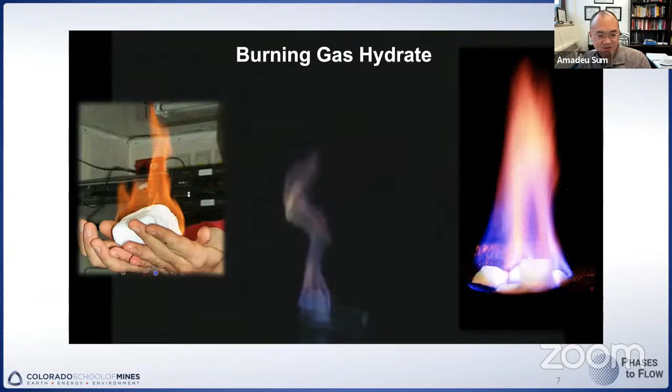Let me start off by showing you this picture, for those who may not be familiar with gas hydrates, starting from the very fundamental aspect of what gas hydrates are. What you see here is someone lighting up what looks like a snowball, but it's actually a gas hydrate, sustaining its own combustion because of the gas that's trapped and released upon dissociation. You can see it burning like a snowball - this dramatic picture of a person holding this hydrate while it burns, but it doesn't burn this person's hand because the hydrate is melting, and the byproduct, the gas, sustains the combustion. The water dripping from this person's hand is cold, so it doesn't burn them.

But what are gas hydrates really? There are four ingredients for gas hydrates: you need water, you need some gas, and the right temperatures and pressures. Under those conditions, water will self-assemble around the gas molecules. Depending on the size of the gas molecules, you form different cavities, and these cavities come together to form what is known as structure 1, most commonly, or structure 2. Those are the two most common crystal structures for gas hydrates, with combinations in a specific pattern that identify these crystal structures.

Now, what is unique about gas hydrates is that it's mostly water - by and large, you have one molecule per cage. There are exceptions, such as very small molecules like hydrogen and nitrogen, which are considered inclusion compounds.

Another unique property of gas hydrates is that they're non-stoichiometric. What I mean is that in these different cages in the crystal structure, not all of them need to be occupied - some can be vacant, giving this non-stoichiometry to the compound. Now, if you were to take one volume of gas hydrate and dissociate it, you would end up with about 160 times the volume of gas at STP, and about 0.9 of that volume in water. So there's a very significant amount of gas stored and trapped in hydrates, and that's one of their properties that has consequences for different types of applications.

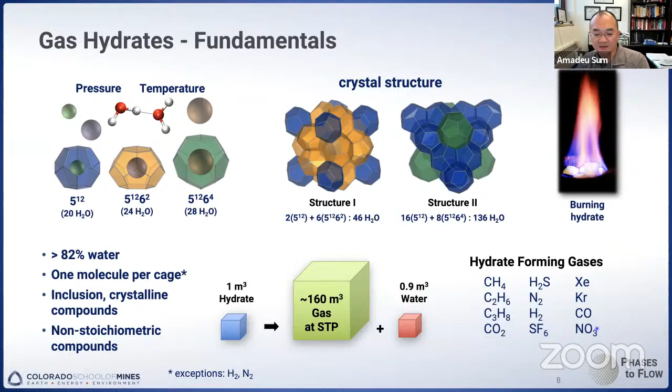Here you see a list of different gases that typically form gas hydrates - low molecular weight gases, some hydrocarbons, some inert gases. Now this is an expanded view of the water cages and hydrate structures, showing how you go about forming structure 1, which is a combination of two types of water cages. Structure 2 is a combination of the blue and the green cages. And then there's another cage denoted as structure H.

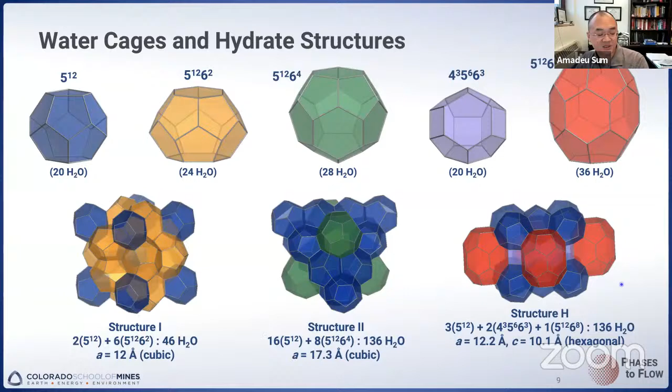That's a combination of the blue, the purple, and the red one. That's much larger, and then it can accommodate significantly larger types of molecules. Structure 1 and structure 2 are very common and mostly found in man-made systems and nature, but structure H typically is not found in most applications.

The structure here is determined by the size of the gases. This list considers structure 1, structure 2, and structure H for the pure formation of the hydrate from a single component. But of course, you can have a mixture, and then there would be a distribution of these gases in the cages that make up the hydrate structure.

One interesting fact is that structure 2 is formed with very small molecules like hydrogen or helium. Structure H requires a small molecule like methane or xenon in order to accommodate these smaller cavities, but it can also accommodate very large types of molecules, depending again on the molecular diameter, and that's what's going to determine the crystal structure.

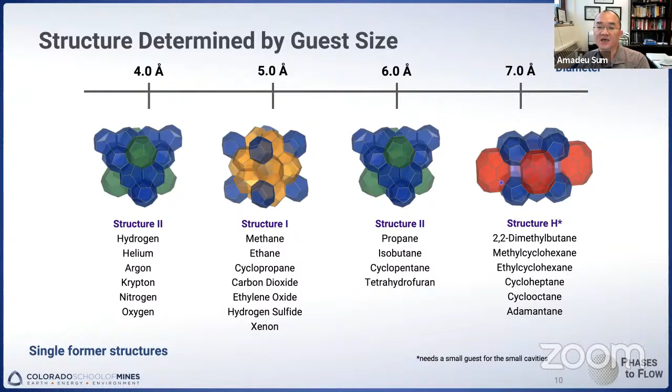Now, let me give you my view of the world of gas hydrates and how I think about them in terms of their applications and the fundamental aspects of it.

There's the good side of gas hydrates, and the good side of it has a lot to do with the natural deposits of hydrates, mostly offshore in oceanic environments, and certainly India has a lot of interest in developing the technologies for the production and recovery of gas from those natural deposits.

By estimates, the amount of gas trapped in gas hydrates surpasses all the other combined resources in terms of carbon. So it's a very, very large resource that can provide a significant amount of natural gas. Especially countries in Asia like India, China, Japan and Korea are very aggressively going after the exploration and recovery of gas from these natural deposits.

Now, I showed you that there's a significant amount of gas trapped in the gas hydrate. So it has also been looked at for energy storage due to the ability of selectively enclosing certain gas into the crystal structures.

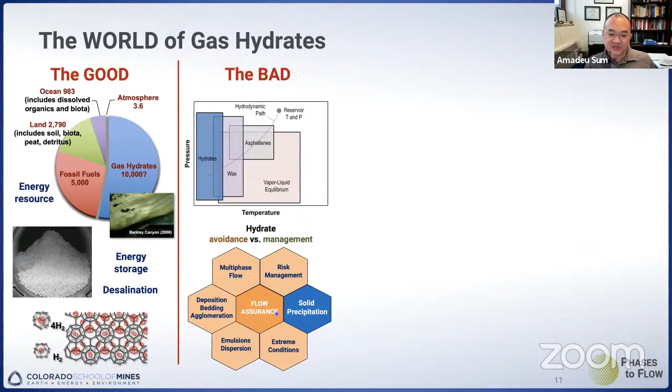The other ugly side of hydrate is that most of the gas trapped in these natural reservoirs is methane, and methane is a greenhouse gas, much worse than carbon dioxide. Especially in the permafrost, there's also a significant amount of hydrate, and there are concerns about the melting of those hydrates, and if they get into the atmosphere, that can significantly speed up the global warming and climate change that we are all already experiencing.

And there's the beautiful side of gas hydrates, and the beautiful side has to do with water. Hydrates are mostly water, and to this day, water fascinates us in what it does.

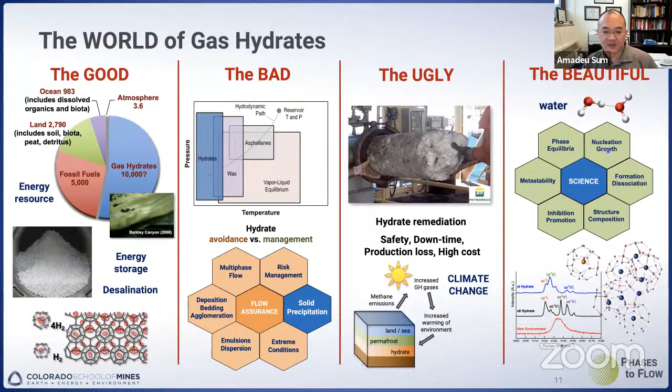And I will show you some of the work that we've been doing here just to address this beautiful side of the nucleation as well. So there's the good, the bad, the ugly, and the beautiful for gas hydrates.

Our particular group is very diverse in terms of the depth and breadth of what we do on the fundamental side and also on the application side, with a combination of experiment, modeling, and simulation. We take this multi-scale approach, looking at the very fundamental to the very applied in terms of how we deal with gas hydrates and how we try to understand it.

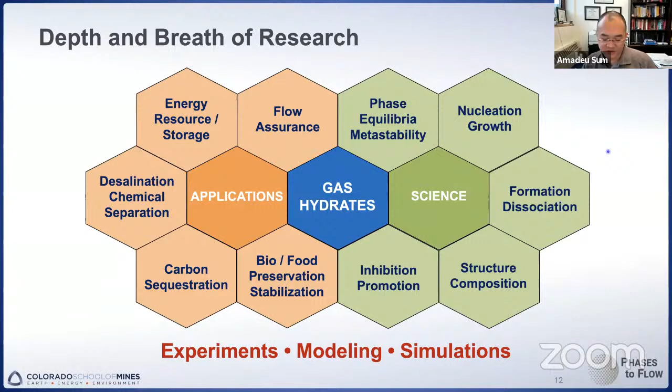So the first part here has to do with when gas hydrates form, and we are going to look at the basic thermodynamics. That's always the starting point. The thermodynamics is essential for us to define the conditions under which hydrates would form.

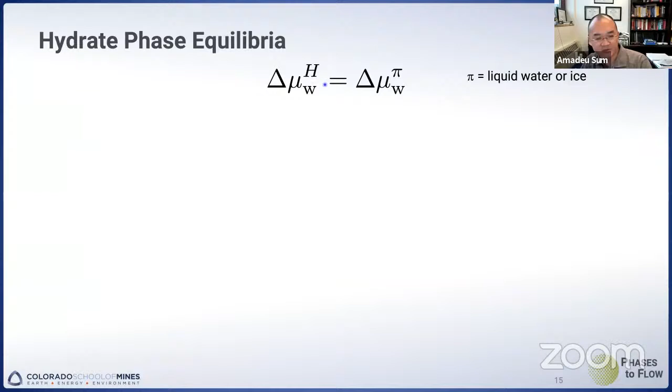That has to do with considering how we learn in fundamental thermodynamics the equality of chemical potential of water. This model, developed by van der Waals and Platteeuw back in the 1950s, relates the chemical potential of water to the occupancy of the cages with the gas molecules.

We can calculate this occupancy by considering something similar to a Langmuir adsorption that you might have learned in your courses. From there, we can determine the chemical potential of water in the hydrate phase, and in this formulation, pi considers either liquid water or ice, which we know how to calculate from changes in temperature, changes in pressure, and how that impacts the water activity.

This formulation allows us to make these sort of predictions, and it is reliable and works really well for uninhibited systems. When I say uninhibited system, it means that it's just fresh water.

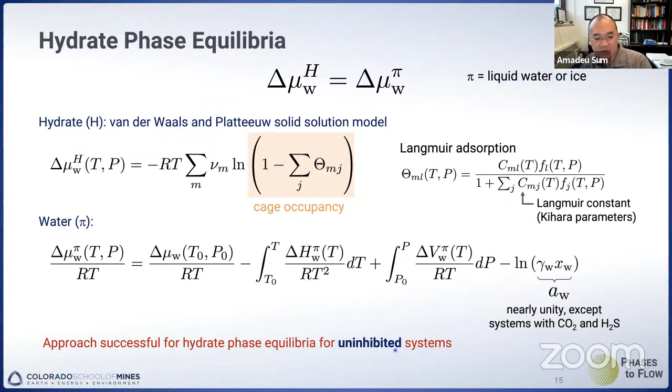But when you consider inhibition of gas hydrates, this is the same thing as lowering the freezing point of water. We can add salts or alcohols or glycols to water to lower the freezing point, and we can do the same thing for gas hydrates, shifting those boundaries that I showed you. I'll give you another example here.

All of that has to do with what you learn in basic thermodynamics regarding water activity. If you are able to determine how much these inhibitors impact the water activity, you can determine what is the suppression temperature. Over the years, we have developed a reliable correlation that we denote as the Hu-Lee-Sum correlation in order to account for that.

So this correlation accounts for any mixtures of salt, or in combination with the typical thermodynamic inhibitors that we typically use, like ethanol, methanol, or glycols.

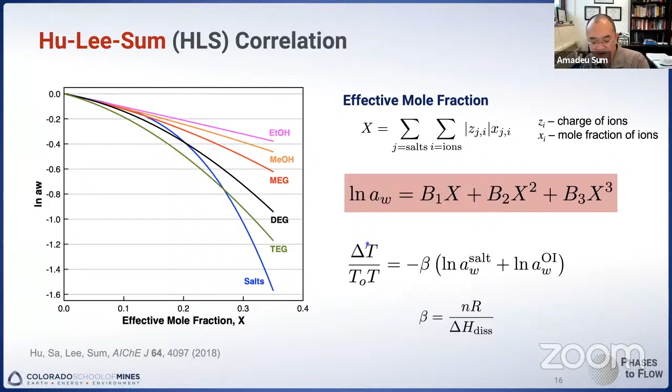This is one of the innovations that we have brought recently, which has essentially eliminated the need to make these very time-consuming, expensive measurements at very high pressure, replacing them with one single trivial measurement that most people have access to with a DSC.

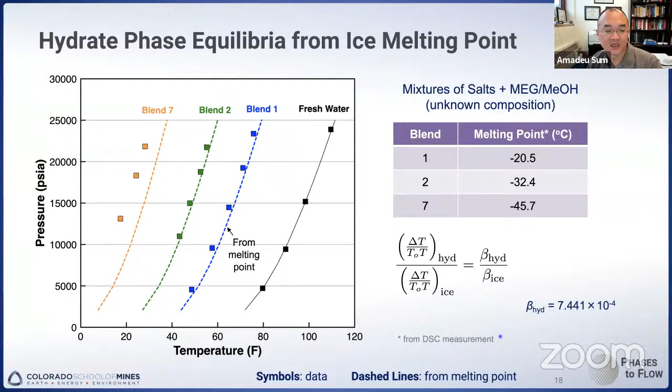Now, let me move on and tell you a little bit about how gas hydrates form at the microscopic level. I'm just going to spend a few slides here to show you what we can learn and what we need to learn about how hydrates form at the molecular level. The tool that we use here are molecular dynamic simulations.

We've been working with this for a number of years, and these are 2 of the most recent papers that we have published on this, looking at the process of gas hydrate formation for propane and for mixtures of methane and propane. We can track the evolution of the system over time.

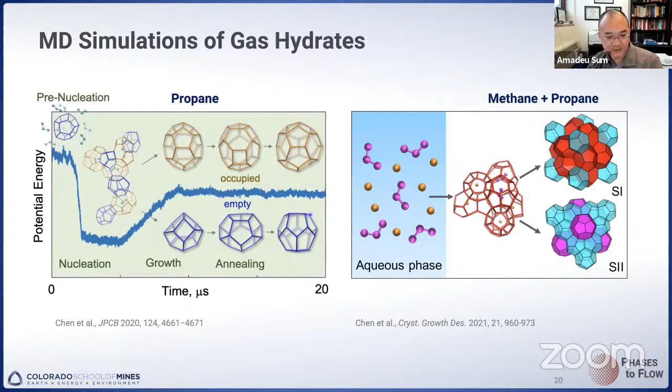From the point that they start initially completely disordered, to the point where they nucleate, and then we see some growth, and then we see some ordering or transformation over time. This is what I show you here in this video.

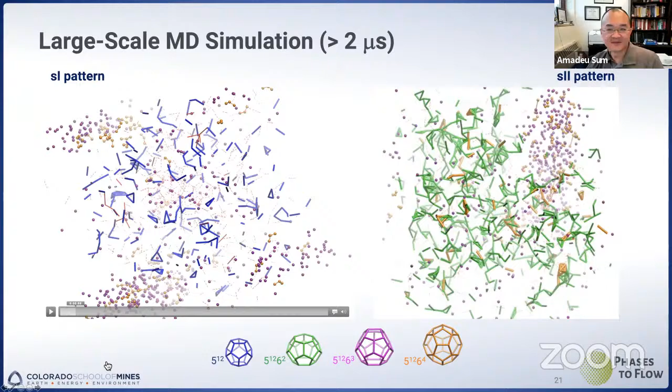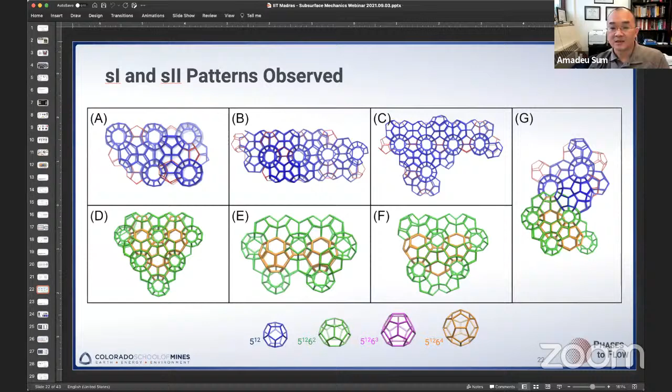Let me change here. This is for one of the simulations. Sorry, it's not playing. It's just very slow. I hope this doesn't crash my computer. I apologize for this. I'm going to have to move on, sorry. Apologies, something is happening here. Always some technical issue. Sorry, I'm not going to play the video because it seems it's going to crash my presentation. Let me just go back here, but I apologize again.

What we see from those simulations is the evolution of the system to form these patterns that can be identified as what we know is structure 1 or structure 2.

These are different examples that we have extracted from the simulations. Unfortunately, again, the video is not working, but you would see the evolution of the system from a completely disordered to an ordered state. And we can learn a lot from this.

in trying to obtain the mechanism for nucleation and growth of these crystal structures. This is still a challenge, and we want to have this insight because if we are able to understand what is happening at the molecular level, we would then be able to better control either the formation or the inhibition of gas hydrates.

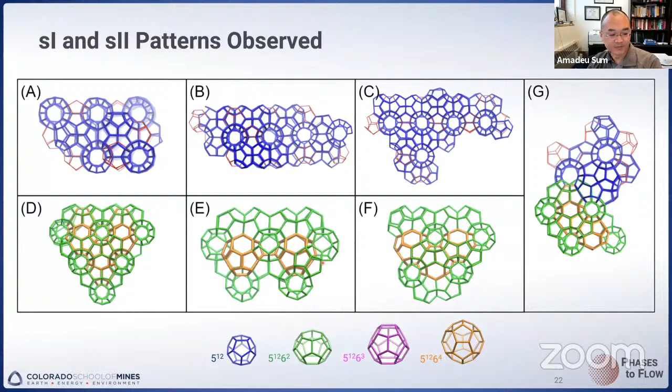This is desirable. It's something that has not just fundamental interest, but very practical interest into the use of gas hydrates in many different areas. But let me move on to consider the macroscopic formation of gas hydrates, which is by and large a lot of the work that goes on in this community.

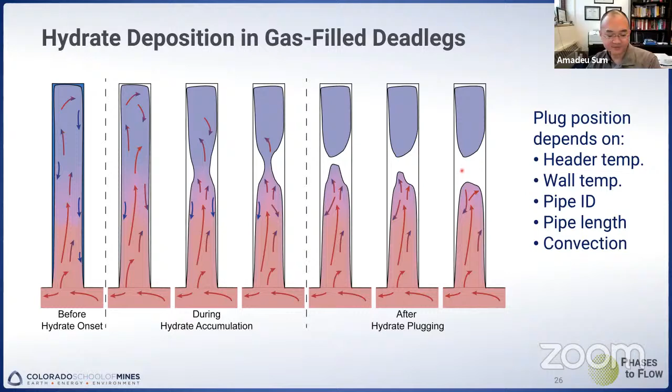These are water droplets that have condensed. Depending on conditions, convection of gas in the cold pipe induces transport of water into the pipe, and over time hydrates deposit. Eventually, depending on conditions, duration, and the amount of water in the system, this can enclose the gas-filled cross-section of the pipe and create a plug, which may or may not be desirable—but it can happen.

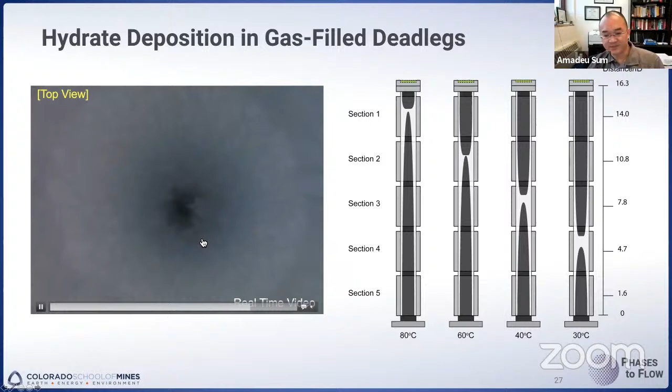Once hydrates form, here's a view of the pipe filled with hydrates. A camera going down into the pipe shows it covered with these soft, ice-like or frost-like hydrates—but it's actually gas hydrate almost closing the pipe with the amount deposited. Depending on conditions, the location of most hydrate deposition can vary, going lower or higher depending on the amount of water getting into the pipe.

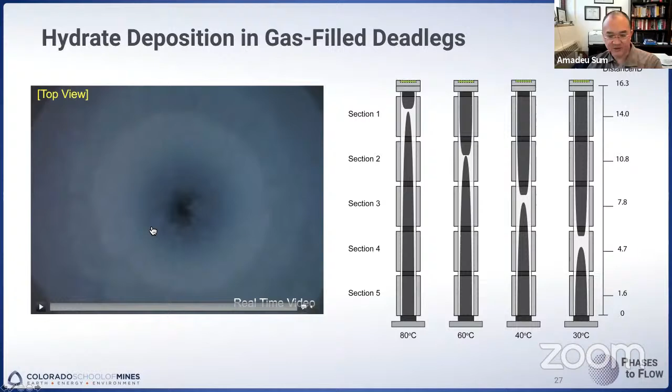It matters how you form hydrates, and there are many different ways to do so. One key emphasis: the conditions, especially mixing and shear imposed during hydrate formation, impact what kind of hydrate you get. In the previous case I showed, it's essentially just convection of gas in the pipe followed by condensation—there's no shear imposed, and this determines the morphology of the gas hydrate and where it forms.

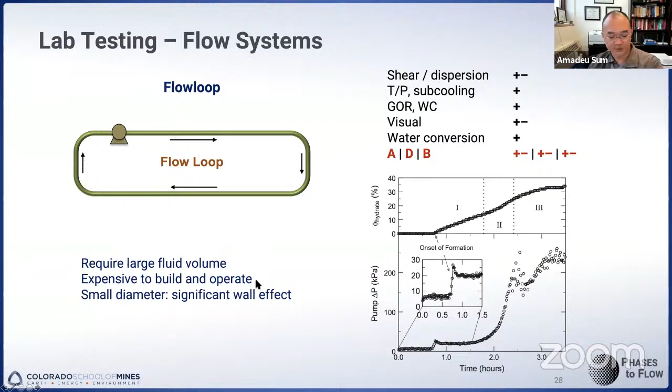There are large-scale facilities that consider shear, mimicking hydrate formation in a flow line—these are flow loops. The issue with flow loops is they require very large volumes of fluid, and are expensive to build and operate. If small in diameter, as many flow loops are, there are significant wall effects. We want to understand what happens to formation in the bulk, and that can be a challenge.

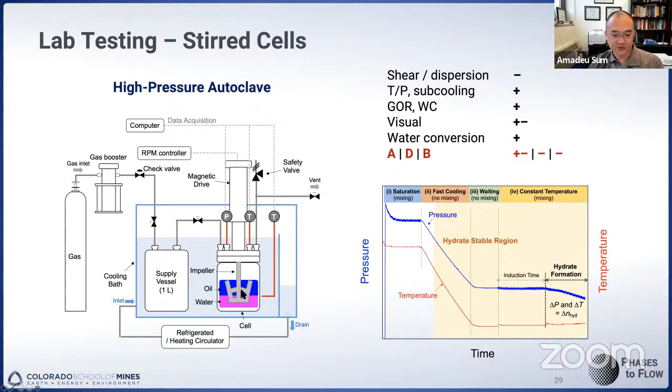Now, more commonly, what many different research groups use is what is known as a high pressure autoclave. This is nothing more than a pressure cell with a stirrer that provides mixing, with shear imposed from an impeller. But depending on the application, this mixing and shear might not necessarily mimic the right set of conditions. So one needs to be aware of this and consider the geometry of the system to understand how hydrates are forming.

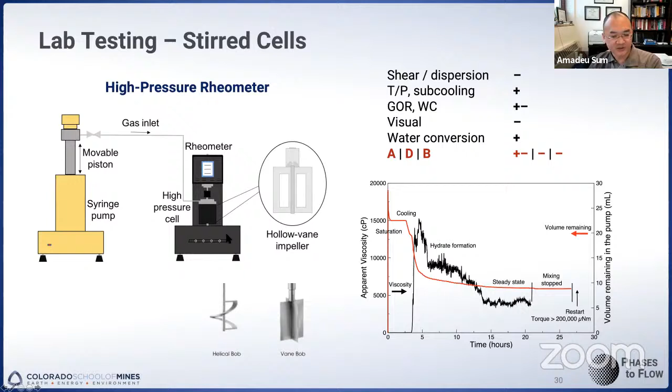The other common system is essentially autoclave-like, except that it's coupled to a rheometer, so you can get direct measurements of the torque that can be translated into some apparent viscosity. There's another piece of equipment widely used for gas hydrate studies, and we have one of those systems as well in our laboratory where we perform a lot of measurements. Another very common type of system is known as a rocking cell.

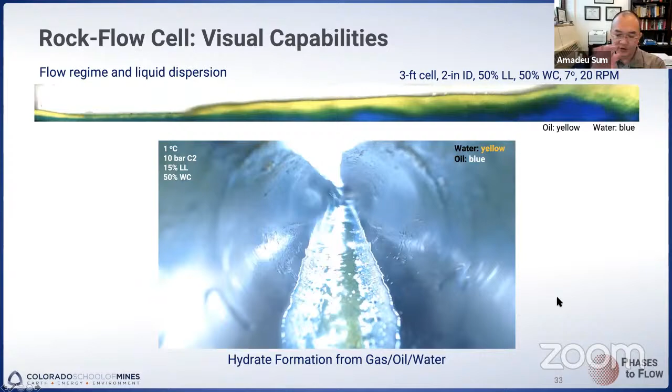This is just to give you a sense of how this particular rock flow cell operates. This is a visual cell that you see at the top with the liquid going back and forth, and then we use a transparent cell with a different view where you see the mixing of the phases. The oil is in yellow, the water in blue, and this is certainly not one-to-one, but it has a fairly close representation to what one would expect in actual pipe flow.

Then here at the bottom, you saw the actual process of hydrate formation. In this particular case, the hydrate formed and accumulated at the bottom of the cell, and then the liquid that remained flowable was just the oil. It forms like an ice-like substance, what it looks like, but that's actually gas hydrates.

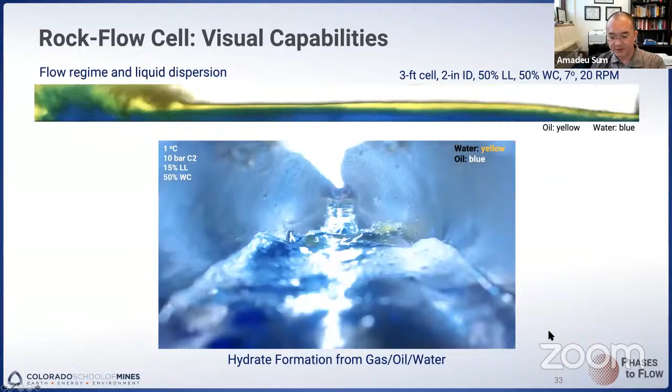Let me give you some examples of how hydrates actually form under shear conditions. In this example, what you're going to see is that the hydrates are going to form. This is a system with oil, water, and gas at this pressure and temperature that we are forming, and then you start to see the hydrate there, going back and forth and being carried by the liquid.

Now, what is very important to pay attention to here is that it appears to have a significant amount of solid present in the system, that solid being the hydrates. But we can determine how much hydrate was actually formed by the amount of gas that is consumed in this process.

If we do that, we have only about 4% of that water being converted to gas hydrates. Certainly what you see there, you would have never guessed that it was only 4%. But what that tells you is that the effective volume of the hydrates is very large, right?

You are not forming perfect crystals of gas hydrates. The gas hydrates are certainly expanding. And the best way I have to describe a gas hydrate is like a sponge, right? It forms these porous structures with a very large effective volume.

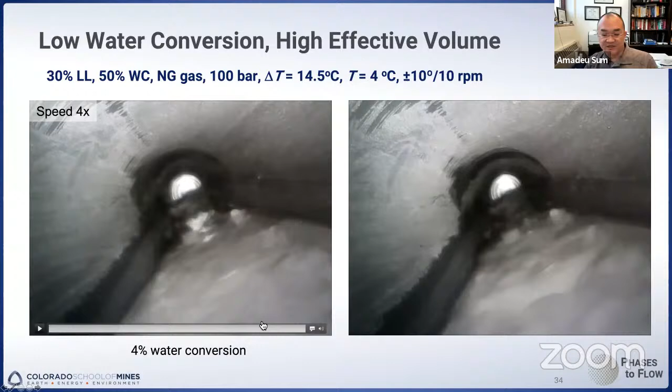We know from experience and from these observations that once hydrates form, all the free water disappears. But even though we don't see it, the water disappears because it is trapped into the gas hydrate. The gas hydrate, again, is a sponge, it soaks up all this water, and this water gets trapped inside of this sponge and doesn't get in contact anymore with the gas, so it doesn't form further, and you end up with essentially a very small amount of water conversion, but a significant amount of solids.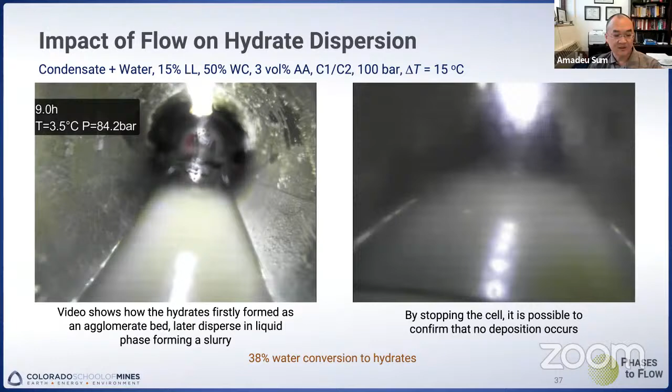I'm going to skip this, except to point out an important concept I wanted you to think about: hydrates are sponges. In India, it's not as easy to experience snow, but here in Colorado we have plenty of it, and hydrates are, in a way, very much like snow.

My kids get very excited in the winter when we get this very wet type of snow, which means there's some free water at the surface. With wet snow, they can compact it well and make real snowballs to throw at each other, at me. But a lot of times here in Colorado we have dry snow, which is powder-like, with no free water at the surface, so we cannot make a snowball because it won't stick to the snowflakes.

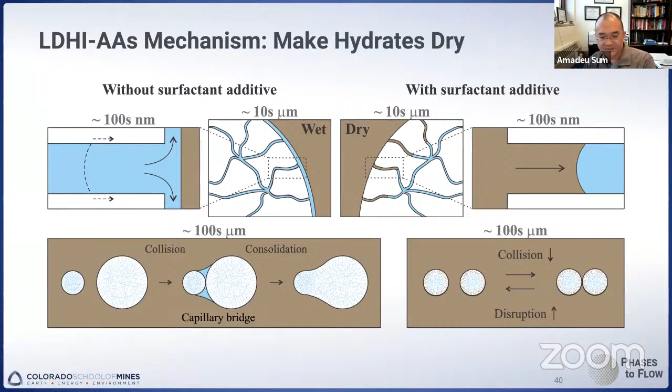Hydrates are the same concept - it's wet versus dry. You make a wet hydrate if the water from this sponge, this porous structure, can permeate and reach the surface, and that allows the hydrates to agglomerate into a large mass. But in cases where we can seal or keep the water from reaching the surface of these sponges, we have a dry hydrate, corresponding to dry snow - they won't stick or agglomerate, and they'll be well dispersed in the system. We've developed a whole mechanism and theory about this, and I just wanted to point out this wet and dry concept.

Let me skip that for now, since I'm reaching my time limit for the webinar, and I want to give the opportunity for discussion or to answer questions and comments anyone might have. But I want to end up here where I started.

I hope I've shown you that gas hydrates are a rich area for science and engineering. There are many different things one can explore at the very fundamental level, and many different applications for these very interesting structures. Hydrates are far more complex than ice and water structures, because we also have to consider the gases that make up the hydrates. I showed you different examples of this porous mixed medium that hydrates are, and I think this is an important concept that more people need to consider when they talk about gas hydrates and what they are.

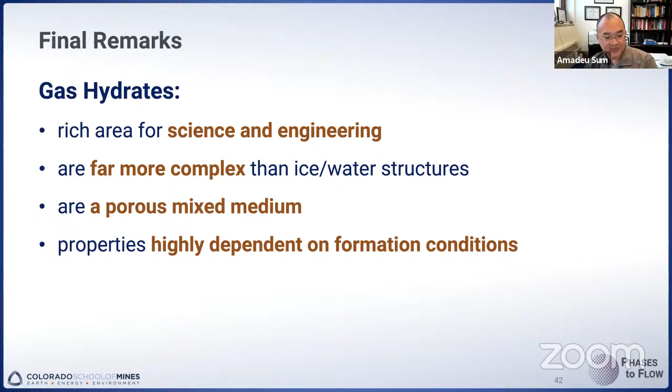Rarely do we form a pure hydrate that has zero porosity. I hope I've convinced you as well that the properties of gas hydrates are highly dependent on the formation conditions. So with that, I'm happy to take any questions. Thank you again for the invitation and for being part of this webinar.

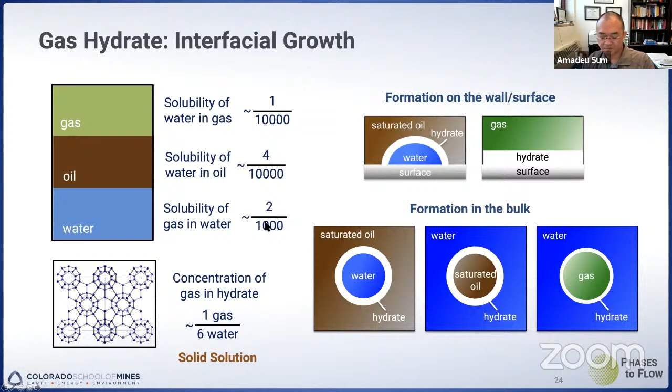Thank you, Professor Sum. So the next question is from Dr. Parul Sahu, and she would like to know, for hydrate deposition in gas-filled deadleg experiments, what is the cold surface temperature and pressure inside the pipe?

Well, in our experiments, we did mostly at 100 bar. And the cold surfaces vary between, I think, 0 degrees Celsius up to 15 degrees Celsius. But the key point here is that you need to have a temperature gradient in the system in order to condense this water. If the system is at a uniform temperature, you're not going to have water condensation, and that would minimize essentially the water that's condensed and in turn the hydrates that's formed.

In all our experiments, the reservoir here, the water at the bottom, the liquid water, was kept at a higher temperature. The lowest we considered was 30 degrees Celsius, the highest was 80 degrees Celsius. So the gradient that you set is important to establish this convection of the gas and the water vapor in the pipe, in order to create this condensation and then formation of gas hydrates.

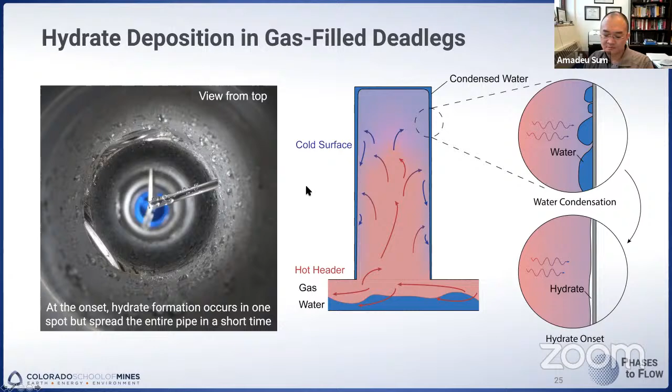So the next question is asking, how do you determine the stability zone for a gas hydrate reservoir? Not sure if that's the intention of the question.

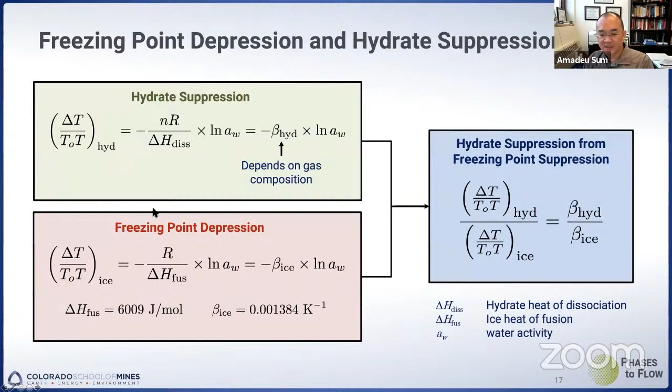So for gas hydrates, the stability boundaries that we determine, whether it's a pure component or a mixture, any one that it might be, is dependent on the gas composition, and if you have inhibitors like salt or anything else dissolved in the water. This, of course, can be measured, or we have tools that can give us this equilibrium boundary, and they are pretty reliable nowadays, the many tools that are available to determine these boundaries.

So in a reservoir in the natural environment, there's certainly a pressure, a hydrostatic pressure associated with that, and there's a thermal gradient at the bottom, as you go into the subsurface from the seafloor. And so you would need to determine what is the pressure and temperature to determine where the hydrate stability zone is. Those who work in this area rely on this type of plots to determine, as the temperature is changing and the pressure is changing, on which side of this boundary you would be.

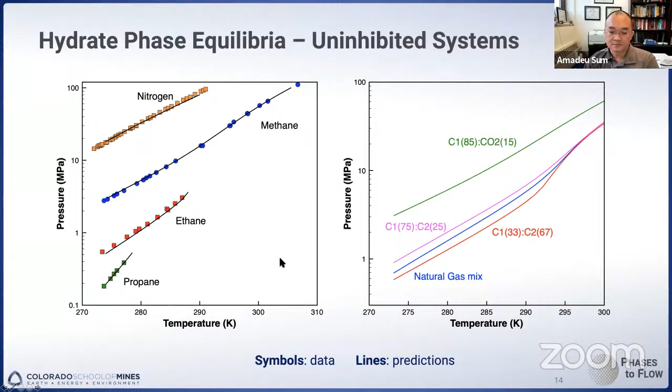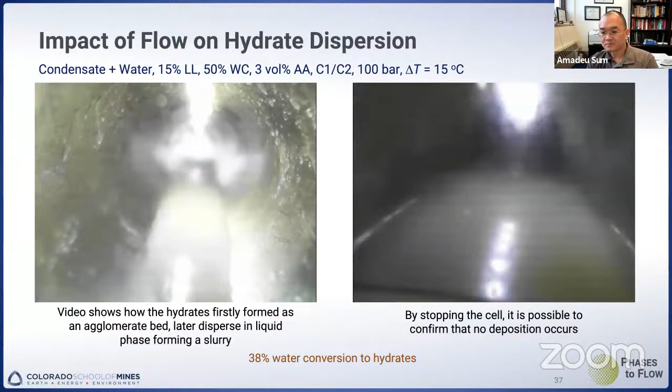Professor Sum, I have one small question regarding the wet and dry hydrates that you talked about. Now, if you consider, you said that when the hydrate is dry, it's difficult to agglomerate, right? I was wondering, because if you look at the surface of the hydrate, like ice for example, it becomes sticky. If you really connect two ice blocks, over a period of time they get connected to each other. So I hope that even if the hydrate is dry, don't you think that they will try to agglomerate even in the absence of water around the surface?

No. If it is dry, there's nothing that will make the hydrates bind. So the surface is not sticky as such on the hydrate surface. Yes, I think this is a new concept that we have introduced to this community maybe a couple of years ago, and I think there is still some debate, but to me there is no doubt about it. Of course, not everyone is on board with this way of looking at gas hydrates. But water is the culprit for everything that happens in gas hydrate.

And anyone can do this very simple experiment that we have done in the lab and demonstrated. You take two ice cubes, and you make sure that they are dry, okay? Form them at a very low temperature and put them in the oil, and then they are not going to stick.

But if you make this ice cube at a fairly mild condition, very close to 0 degrees, and keep it at that temperature, you're going to have some water at the surface. It's not going to be converted, and they're going to stick. Think of hydrates as sponges, and they're deformable. Under shear, if you squeeze the sponge, the water is going to come out, but if you don't, the water just remains inside. If the water doesn't reach the surface, the hydrates have nothing to stick with, essentially, because the water is the glue that makes the hydrate stick.

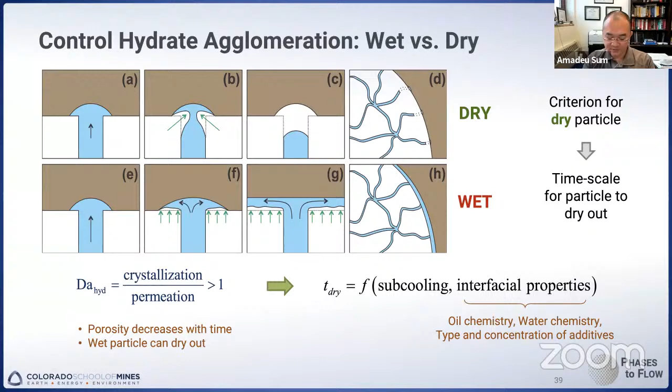So, a very, very nice question. Thank you. I think it all depends, again, on what I emphasized, it depends on how you form the formation conditions. A lot of this unexpected morphology that I showed you is induced by shear. And the pores that you're talking about in sediments, you're not going to have much shear, right? It's going to be very much like a static system. So the process and the way the hydrates are going to form is going to be very different.

But I would still emphasize that the hydrates that are formed are going to be somewhat porous, maybe not as porous as you see here, because there's a significant amount of shear that's imposed. But this porous structure, you can still think of a sponge, will facilitate water transport through whichever the initial layer of hydrates is formed. It is always the water that's going to be moving, not as much as the gas. Think of a pore with water on one side and gas on the other. You initially form a hydrate at that interface. To continue hydrate growth, water or gas has to be transported one way or the other. Most likely it's the water that's transported through this hydrate film that you form that is porous, because it's much easier for water to get through than gas, right? Gas doesn't like water. The hydrate likes water, so water is going to make it through. That's an important consideration if you're thinking about how to develop your experimental system to form hydrate, especially when you don't have shear in the system.

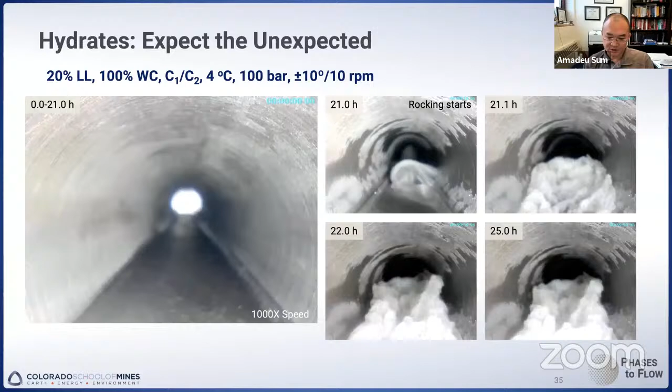Great question. I think this has a lot of relevance to what we are doing and telling our industry sponsors about how they can manage hydrates. From what we know and have seen, you can actually eliminate all chemical injection and just rely on the shear, the hydrodynamics of the system, to disperse hydrates. You can create a very finely dispersed hydrate system, just like I showed in this video, under the right set of conditions.

So in the way that I describe hydrates in terms of their transportability, you can get any kind of outcome depending on the shear. What is the shear that gives this set of conditions? I can't say, because it's very system dependent — temperature, pressure, how much water, how much oil, what type of oil, and the actual flow pattern. So it's very complicated, which in a way is great because it keeps us doing the research. But to answer the question, yes, you are able to control that.

And even with chemical additives, just because you put one in doesn't mean it's going to work the way you expect. It depends on shear as well.

Thank you, Professor Sum. The final question we'll take today asks how much deviation can we expect in terms of the mechanical properties between naturally formed gas hydrate sediments and the synthetic ones formed in the laboratory? Great question. Yes.